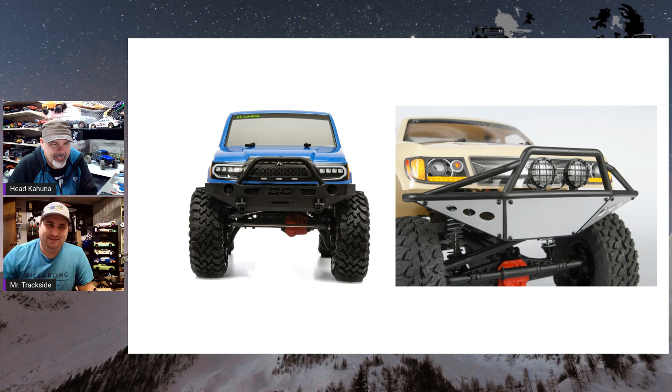So why do this on this base model? If they were looking for a scale detail kind of look, they could have done a fake front winch or something, like the Sport. Now, I'm not saying the Honcho's bumper is the most beautiful bumper ever made, far from it, but it's not a licensed bumper, and it's already something in their wheelhouse. They could have made it and used it. I think they should have incorporated something a little more of a pre-runner style bumper onto this.

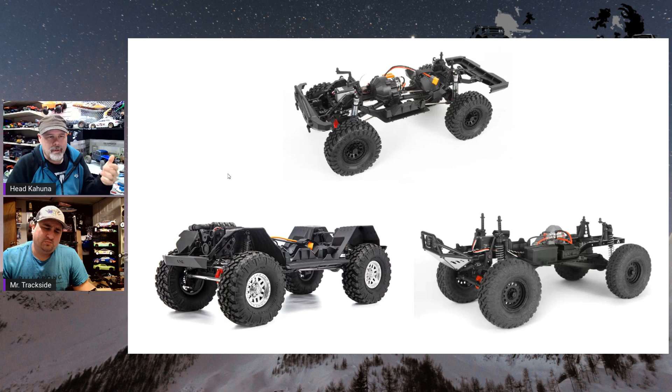Because it's an entry level truck, all these guys are complaining about the body and how ugly it is. How many people actually run the body that came on their truck? I don't, you don't. I think the only one that would run it is until it's scratched, then you get rid of it.

I think the one that would be the new Traxxas one, with the clip style that has the inside fender ones, because you just can't put that on something else, right? But even the Traxxas TRX4 platform, you can still put regular body posts on it and run a different body if you wanted to, unless you want to incorporate that clipless body mount system.

Now that's a good point, because not only do they have body posts on this one now, which you can see here and here and here, these body posts are bent way forward, they're never going to last. No way. I thought they had a little spring to them or something. Yeah, I think they're just going to snap. I think they're relocated into a different position, and I like how they've done that.

But at the same time, if you wanted to use the clipless body look, the no body post free look, they still have the same mounts in the frame, so your other bodies will fit this chassis. They're the same wheelbase.

So just showing quickly here, up top we've got the new Base Camp, below we have the original SCX10, and over here we have the Honcho, which is the SCX10.2 platform. As you can see, there's a lot more space in the 10.3, the original, in the middle.

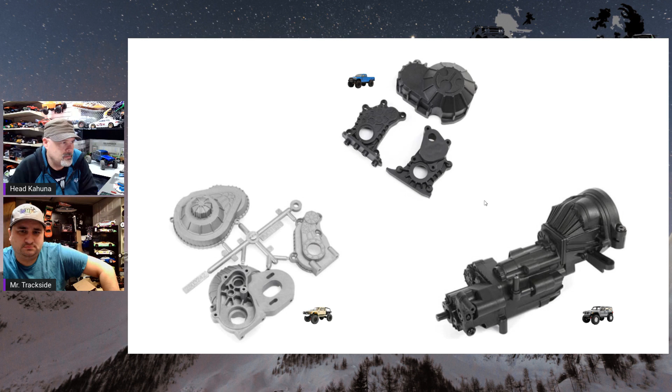They went down to—let's show you guys this one here. So this is the new housing. Okay, just quickly, because you're asking about transmission—the new housing, if you notice, it's got like, what would you call that, doweling almost, to seat it and line it up properly into the chassis plate. And it is 4-bolt, but it's 4-bolt only on one side. That's kind of different. So you're putting all your stresses and all your load on one side of your transmission case—one half the case.

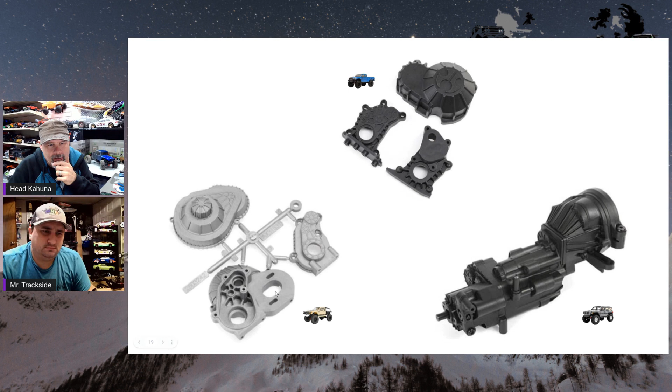Now, the old style, in the 10.2, had your bolt holes here and here and here and here. So you were splitting that load between both halves of the housing. And those kind of kept the transmission together too, from the bottom up, and then this.

If you strip these holes on the side, like your side mounts—the way this one sits—if you strip out these holes or any of the threads in here, because they're plastic threads, if you strip out any of these threads, the whole thing's just going to wobble. There's nothing to help hold it lined up.

An advantage to the new one is that it is a metal motor mount again. It's gone away from this plastic one that they made for the cheaper stuff. Yeah, that's nicer. I like the metal aspect.

And then comparing that to the 10.3, the original 10.3 with the 2-speed tranny and the dig and all that stuff—I mean, this thing's a behemoth compared. So there's a big difference there. And you get into the guts of this thing—so they took the old 10... nobody wanted this anymore, all of these parts. This is just the 10.3. The original 10.3 down here is a nightmare of parts. You pull it apart, all kinds of things moving.

So I guess no one liked, like you said, no one liked the dig, no one liked the 2-speed. So like, screw it, you get this now. So they threw it out of there. But then I still think they over-engineered this one, or overthought this one, in my opinion.

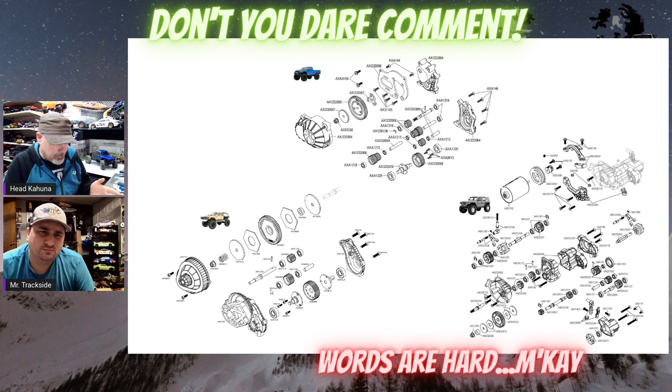The original SCX10.2, which was also the same as the 10.1 gear—yeah, why was it a 3-gear? For your gear reduction, everything was fine. Everything worked fine, wasn't as beefy in some spots as it should have been, but that slowly got them. But that was like the go-to transmission for everybody.

They put that in everything. They took this new one and threw it in everything. This new one is now a 10—big 10.4, buddy. And the 5-gear is in there so that the rotation is proper for your drive shafts, because you are now running on portals.

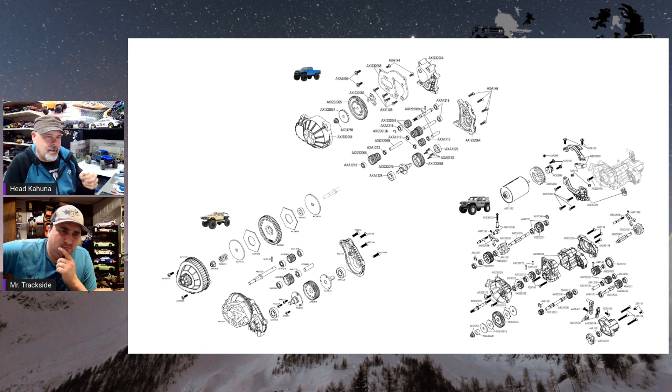And the idea of this transmission is you can take the 1 gear out, relocate it into the transmission. I can't remember if it was flip it over or which way you do it—pop the 1 out, flip it around and put it back in, or move it into a different slot. There's different guide holes in here in the actual transmission housing.

So now you eliminate, and it changes the rotation of the transmission so that when you go to a straight axle setup, instead of going portals, you just change that gear. Okay, I mean, yeah, that's great, that sounds like a great idea if you weren't able to reverse your motors. But how many motors out there, how many ESCs out there, can you not just reverse the direction of the motor?

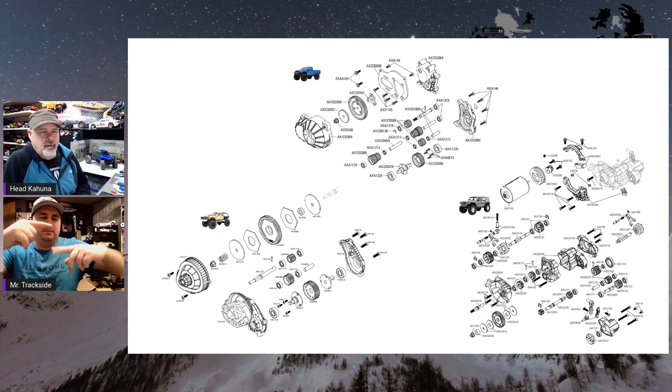Well, I think back if you're running a brushed motor, the way the brush is attached to the armature of the motor, if you're running a cheap brush, it'll go one way, not the other way. So buy one that's got the regular stock rebuildable brush motor, up and down one, go straight in. Anyone that you can change the timing on the motor, that's a moot point now, right?

Yeah, so I just think that's kind of a silly, over-engineered thing. And I also think that's one of those things they could have gone another direction with and saved themselves extra cost.

Now, there is one thing I've heard said, and that is that when you go to change your portals to the straight axle, then you lose another gear reduction. So then you also end up being higher geared, because now you're straight axle, you've lost that reduction in the axles. So I am hearing rumor of there being a possible different set of gearing you can put in this transmission to change that.

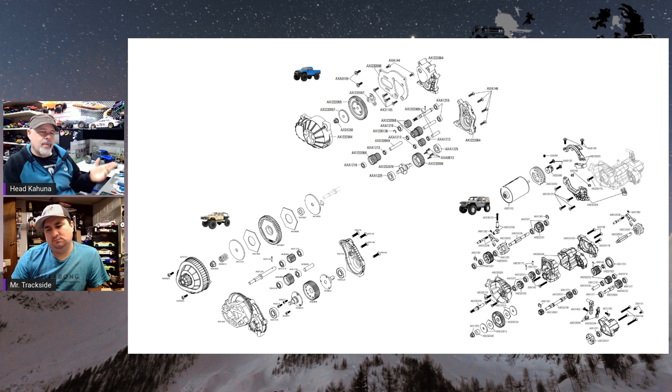But that's also another thing you can gear out with your pinion, you can gear that out with your spur gear. There's a lot of other ways you could gear that out as well. You could change the gearing in your diff housings, all kinds of stuff, right? Just saying, I don't personally understand why, if they're going to offer a straight axle version, why don't they just change the gearing in the pumpkin of the straight axle conversion to make it equivalent to what it would be with your overdrive? That would be my fix.

I think that this whole thing here is over-engineered. The person who wants to put straight axles on is going to want to spend that extra money, and they will spend that on different gearing and stuff in there. I don't think it needed to be engineered into this in an entry-level truck.

Yeah, what would you want to change out? Would you rather change out the whole transmission? The transmission is usually in the middle of the truck, everything is attached to it. The quick and easy thing is pinion and spur.

Done. Another thing I noticed on this, the old 10.2 and 10.1, they had these plates in here that bolted on both sides of this gear. The new one, it's a one-piece spool with your out drives on both sides, and they still attach separately to the gear, but it's a solid one-piece.

So that's a plus, isn't it? Well, it's basically, instead of you getting that twisting force going like this with the gear in the middle, you've taken it now so that twisting force is being shared through the drive line, and you're just rotating the whole thing. I think it's eliminating some shearing forces. Oh yeah, so it was simplified, but not simplified.

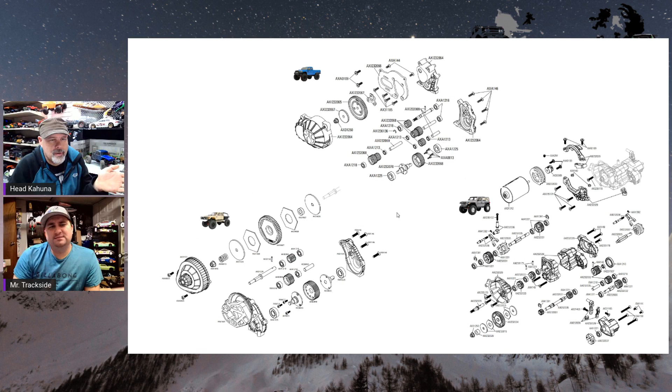Another thing you'll notice when you look at this... Yeah, go ahead, what were you going to ask? Is it much more simpler than the 10.3, the old G 10.3 original transmission? There's a lot going on in there. Oh yeah, the 10.3, like I said, was a nightmare, it scared most people. But so you take a look...

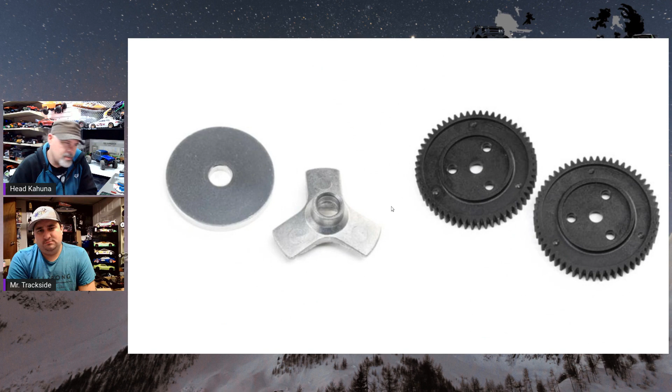They also changed out, there's no longer a slipper pad setup in this. There are no slipper pads for this transmission, this is a hard piece. If you can see it right here, this is the piece, it is a metal piece. It goes directly into the spur gear, which is held on with a washer and a nut.

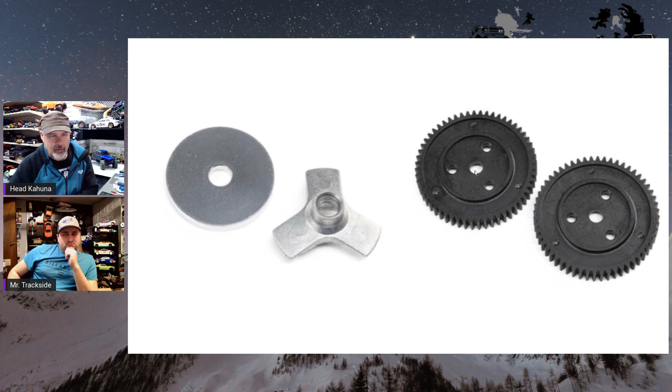There's no springs, there's no slipper pads anywhere in there, which is fine to me, because almost every single truck, any crawler that I've ever seen, most guys are immediately taking it and putting it to direct drive and slipper eliminators and stuff, right? So they've eliminated the eliminator.

But my whole thought about slipper is that sometimes that thing needs to slip. Like if you got the wheel caught up on something, it needs to slip. I've never encountered that on a crawler. That way you don't end up bending your axles, breaking stuff. Nah, I've never encountered that in a crawler.

I agree with that on something that's a higher speed unit where you might land and you're going to get that shock load, and sometimes you want a little bit of slippage. Yeah, but when you're crawling and relying on something like a slipper, I think it turns into guys who do too much trigger, and they need to learn to finesse the trigger when they bind up and get into a bound up situation. Instead of just giving it more juice, maybe back out of it a bit and reassess.

So anyways, in the gearing, if you buy another set of spare gears, it does come in a package of 2. You can see 1, 2. And this is all you get for the slipper eliminator setup, whatever.

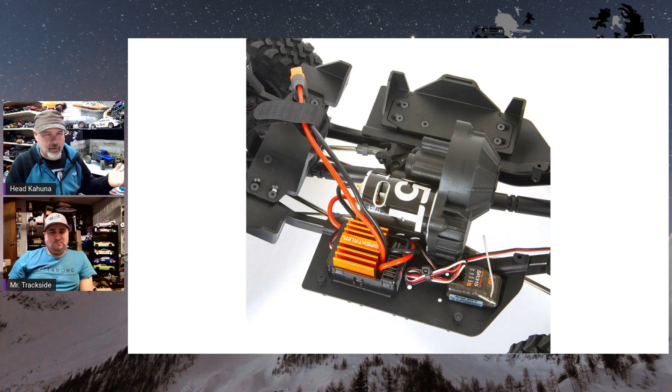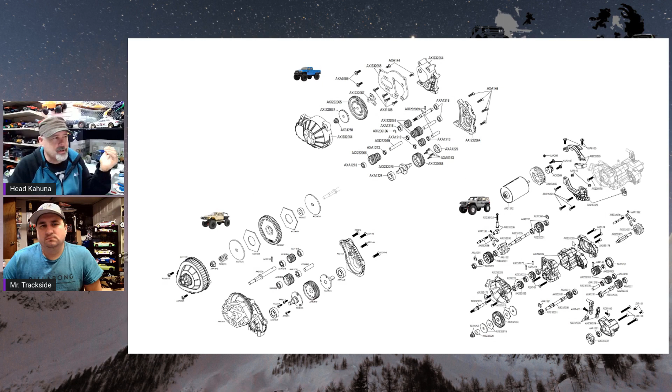Let's go back here, I want to show you guys something else that they changed up. I don't know if it's going to be super popular. They also changed out the shocks. Now they went to the aluminum cap. That's fine, metal cap, awesome, right?

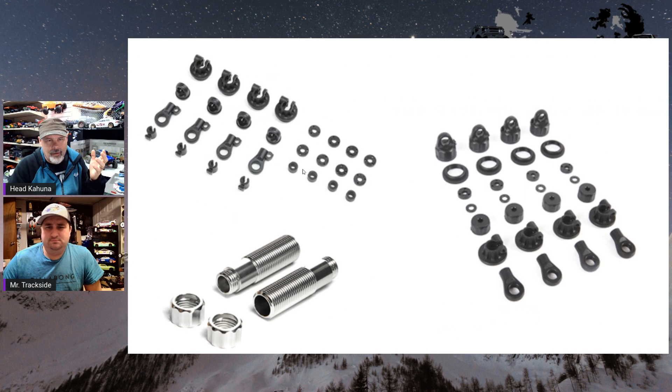So these are the two different sets of parts. These are the new Base Camp line and the Base Camp shocks housing. Biggest difference between this one and the 10.3 original is just these caps. This is the cap for the 10.3, they're all one piece with the bleeder screw in the top. These are now the caps for the Base Camp—no bleeder, but it did change the bottom.

Yeah, that's what I like. At the bottom of it, you're going to capture it with your spring retainer. You put the bolt through the spring retainer, and it's going to also go through your opening on the bottom of your ball end. So that's going to help stop that from possibly moving up and down at all.

I like that, because how many people ever had that problem. I never really did, but the problem I had with mine was it would move, or the spring would come out, and you'd have a spring off there and that thing's all over the place. I don't know if this is going to change that problem. You're saying the spring would come off the retainer, and the retainer would come off too because you hit a rock - there's always that weird rock you hit, and it pushes it up, and it's gone.

Well, yeah, okay, I guess. That was kind of the point of this being clamped. You could clamp that in there, and then it would clamp onto here. Yeah, all they've really done is put a plastic molded piece in here now. A bolt goes through there, and now it's going to hold that in place. So even if it wasn't tight all the way, it's still not going to come off, right? Yeah, because I'm not too sure how tight you can get it on there to hold it. So they made that change.

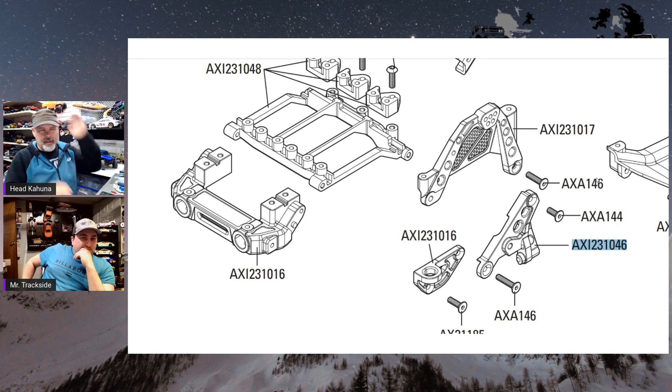I think what would be cool to see with this, since you got the servo mounts, is to be able to put like a cam on your shock mount, and be able to adjust it so it kind of shifts it over like the 6.4. So you're on a side hill, you want your car starting to lean over this way. So you're saying put your steering servo up here or in the middle, and then have one for your shock on each side, and do the old left and right - lift it up or lower it down.

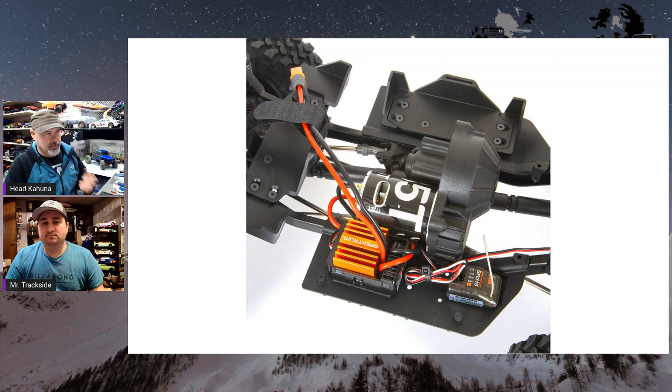Yeah, I thought about this a bit after the fact. If I have a picture in here, so this is the transmission. I don't know if maybe the reason they've offered all of these different positions in here for servos - is there a future possible 2-speed linkage system where you put in a 2-speed or a variable? Maybe they're looking at a variable overdrive setup, something like the Element Enduro has, where it's got the built-in overdrive in the transmission, and maybe you can shift it or change it.

I don't know, you never know what the engineers have hidden up their sleeve. I just think it's really suspicious to have 4 servo locations at the front when you're only using one for steering and maybe one for a winch. I guess if you were a comp guy, maybe you'd want a rear winch, and run the line out through an antenna tube or something and scoot it out to the rear. You could do that, I suppose.

I understand moving things around, but it seems like a lot of engineering in here and designing it in when it could have just been made as a metal plate. There's got to be a hidden reason.

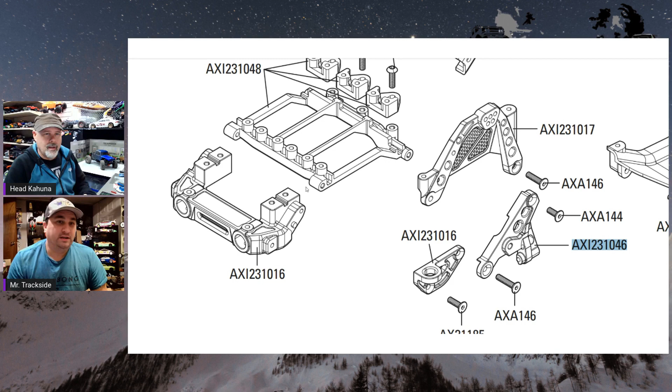I think they were probably trying to do an SCX10.4 and couldn't get all the parts sourced and everything done. So they just put a couple things in from the next model, transmission-wise. Maybe there'll be another transmission option out there that they'll sell, that drops in and uses one of these servo locations. So you'd use a dig, variable overdrive on the front end, whatever. Who knows? There's all kinds of different possibilities out there. Or you could even have a 2-speed with that as well - 2-speed, dig, variable overdrive, and your steering.

Let me just take a look here at the housings. See, when you look at this housing, I don't see any removable plugs or anything in here anywhere. So I don't think this transmission housing is going to be utilized to do any kind of shifting in the transmission. I don't know.

So yeah, that's the new goodness, the new sexiness, the new bestest. I think it's a nice truck. I do think the real thing here is that they're trying to regain their market share that they had before, as the entry-level budget unit.

I do like the blue - my blue is my favorite one so far. Actually, I don't mind the tan either. I don't like the green, that's just me. I don't like the headlight stickers, I think they're kind of ugly.

I don't see the point in a licensed front bumper. I do see the point in the licensed tires, because the tires are actually a fairly good compound and that tread pattern does work. I don't see the point in the licensed wheels when you have your own plastic wheels. So I do think they could have saved that extra - the $20 difference between the Sport and Base Camp - by not over-engineering the transmission and not putting the licensed stuff on here.

I think they actually could have come in closer to the $300 mark myself, but it is what it is. It's another model, and I'm glad they came out with a cheaper model, because the SCX10.3 line, honestly, was starting to get out of that realm of entry level. Yeah, it was getting up there in price - another Jeep body, licensed Jeep body with everything on it. It was what, like $700?